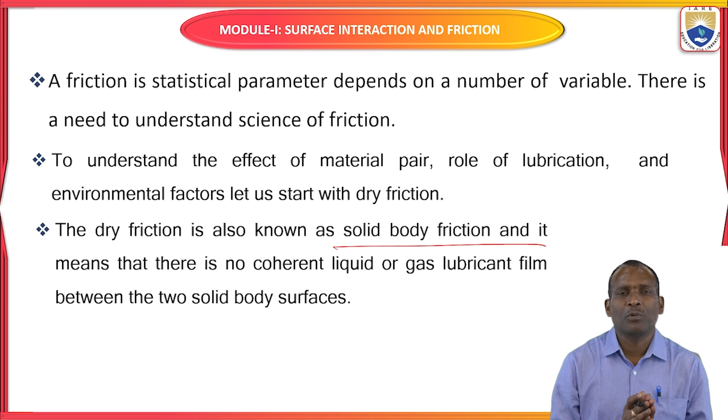Whenever lubrication is present between two contact surfaces, it may be minimum film thickness lubrication or hydrodynamic lubrication, and that may be called wet friction. That's why dry friction is also called solid body friction: there is no lubrication, no wet contact between these two surfaces. The two are purely solid. Another important thing here is the adhesion property.

Here there are two main friction sources: one is adhesion and the other is deformation. Some force is needed to plough asperities of the harder surface through the softer one, to remove the material, to scratch it, that is, the asperities, irregular surfaces, through the soft surface. In the lubricated tribopair case, friction due to adhesion will be negligible, while for smoother surfaces under light load conditions, the deformation component of friction will be negligible. So two conditions are there: adhesion and deformation.

In a lubricated tribopair, adhesion is negligible, and for smoother surfaces under light load conditions, the deformation component of friction will be negligible.

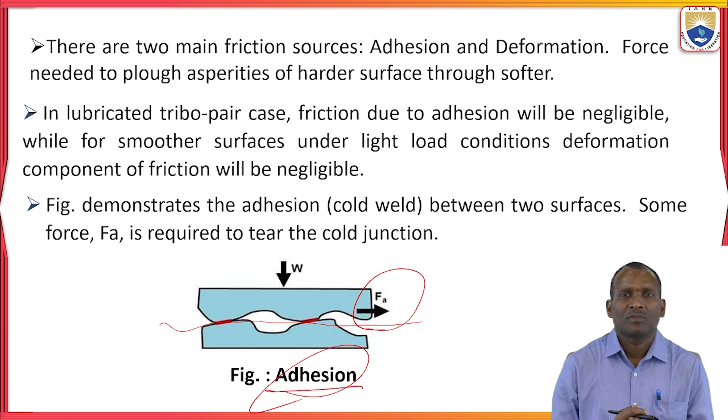This figure shows the adhesion property; it demonstrates the adhesion cold weld between two surfaces. Some force, which you can call Fa, is required to tear the cold junction. Suppose you want to tear these two surfaces apart; this is called a cold weld. Some force is required, and only then is tearing possible. So adhesion mainly means the contacting of surfaces: two surfaces in contact, and that is called a cold weld.

In the deformation case, this figure shows a conical asperity approaching a softer surface. To move the upper surface relative to the lower surface, some force is required, shown here as Fd. Fd means deformation force: to deform the surfaces, some force is required. In the previous case, adhesion, it was Fa, and here Fd for deformation. So there are two friction sources: deformation and adhesion.

So what is the resulting force, and how will you calculate it? It is the sum of the two contributing force terms, Fa and Fd. The resulting force Fr equals Fa plus Fd, which gives the resulting frictional force. In the lubricated tribopair case, adhesion is negligible; for smoother surfaces under light load conditions, deformation is negligible. So if the surfaces are lubricated, the adhesion is negligible.

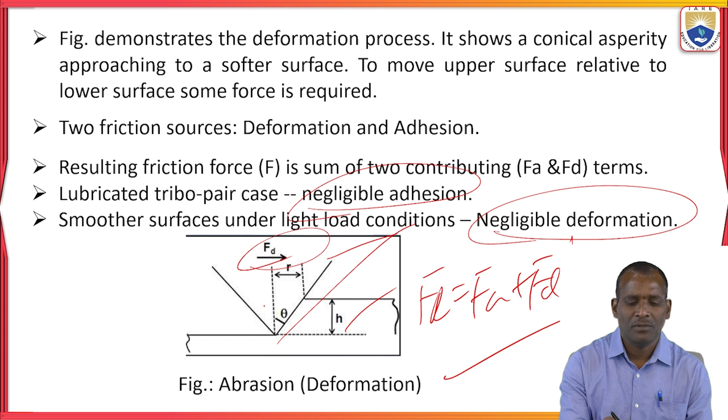So what is the theory? The first one is adhesion and deformation theory. We have seen how to calculate the resultant frictional force. This theory is based on the fact that all surfaces are made of atoms. So this theory is called adhesion and ploughing in friction.

So this figure shows the cold welding in steel and indium. The cold welding process is applied between two surfaces, two materials. One is steel, another one is indium material. So in this example, suppose this is a steel material and indium material. If you press the steel material over the indium piece, they will bind across the region of contact, like this. So this process is sometimes called cold welding.

Since the surfaces stick together strongly without the application of heat, there is no need for heat here. Without heating the material, you can apply force on one material to press it over another material. Due to the adhesion property of the materials, the two surfaces stick together. This process is called cold welding.

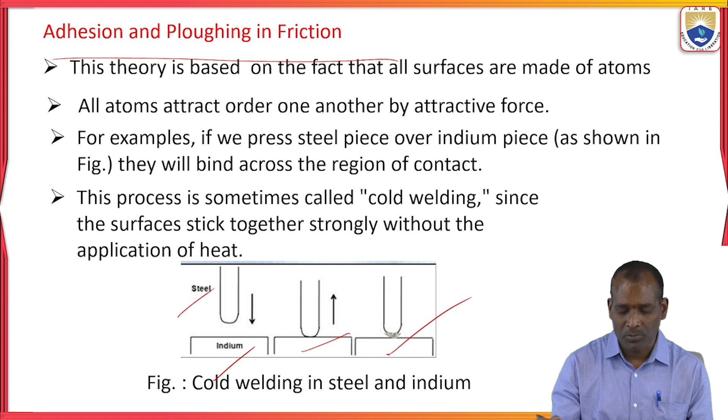So in this, the surfaces are made of atoms, meaning they attract one another by attractive force. So here we see the cold welding of steel and indium. It requires some force to separate the two surfaces. Here is shown carbon graphite and stainless steel. Stainless steel, and this one is a carbon graphite material. Some force is needed to separate these two surfaces.

If you apply a sideways force to one of the surfaces, the junctions formed at the regions of real contact will have to be sheared if sliding is to take place. So whatever force you apply to do this is the frictional force. The figure shows carbon graphite material adhered to a stainless steel shaft. Due to some application of force, this happens. One material adhered to the stainless steel shaft. Here two materials are shown. One is carbon graphite, another one is stainless steel.

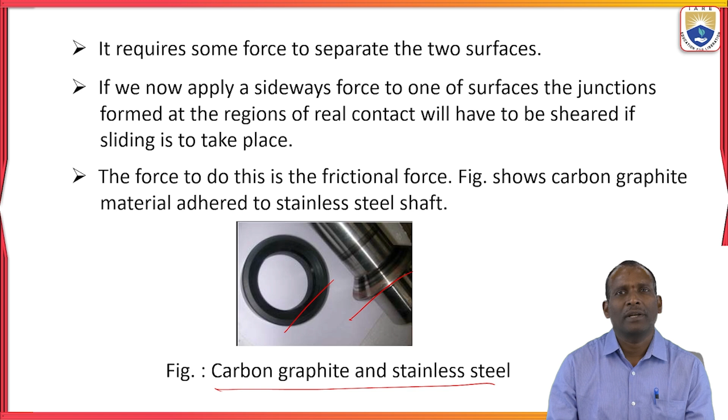The next theory is the theory of adhesive friction. This theory was developed by Bowden and Tabor. So what is this adhesive friction? As per this theory, on application of some force, that is W, the initial contact occurs at some of the higher asperity tips. Due to high stress, those asperities suffer plastic deformation, which permits strong adhesive bonds among asperities.

So whenever you apply a force on a material, some stress will be developed. Due to this high stress, all the asperities on the surfaces undergo plastic deformation. So it leads to adhesive bonds among asperities. Such cold formed junctions are responsible for the adhesive friction.

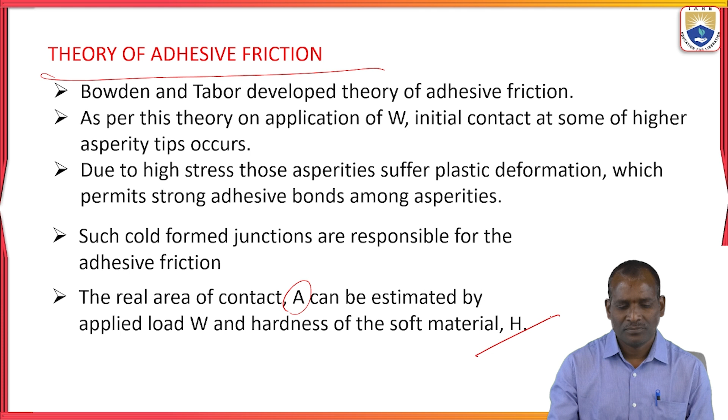So the real area of contact A can be estimated by the applied load W and the hardness of the softer material, that is H. If S is the shear stress of the softer material, then the adhesive force required to break these bonds can be estimated by the equation Fa is equal to area into S. So you already know the shear stress S is equal to load per area.

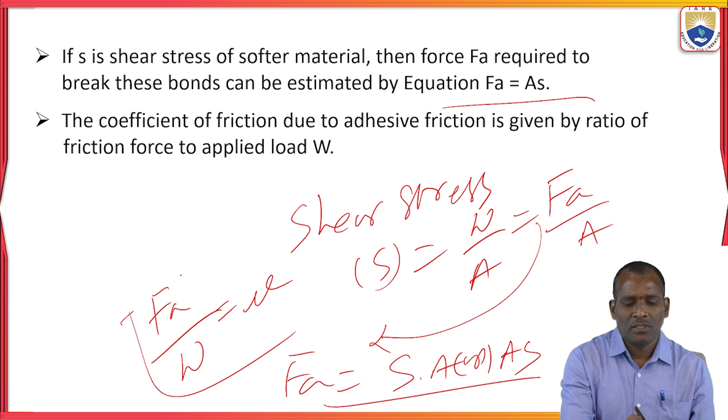So here it is the adhesive force upon the real contact area. So you can write Fa is equal to S into A, or AS. By using this equation, you can calculate the adhesive frictional force. The coefficient of friction due to adhesive friction is given by the ratio of frictional force Fa to the applied load. So by using this equation, you may calculate the coefficient of friction.

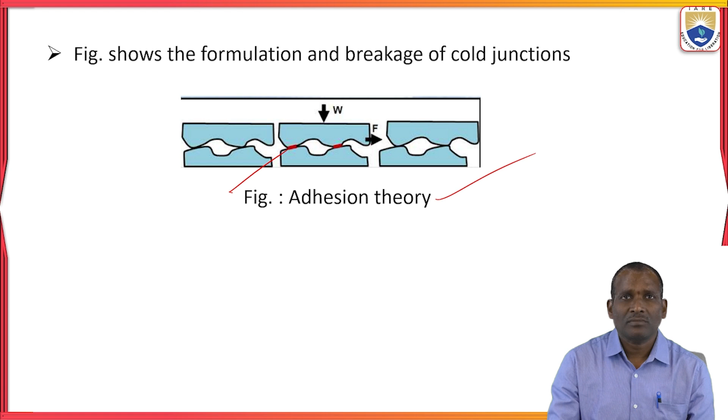So in this figure, two surfaces are pressed together under load. The material deforms until the area of contact is sufficient to support the load, that is, A is equal to W upon H. Here H is the hardness of the material. The material deformation depends upon the hardness of the material. To move the surface sideways, it must overcome the shear strength of the junctions with force Fa.

So you already know mu is equal to frictional force by load. So you can write it in terms of shear strength and hardness, where S is the shear strength and H is the hardness of the softer material. So these two values decide the coefficient of friction.

So it means whatever the properties of the other harder mating material, the coefficient of friction would not change. The coefficient of friction will change only due to the hardness and shear strength. Whatever the remaining properties, it will not change.

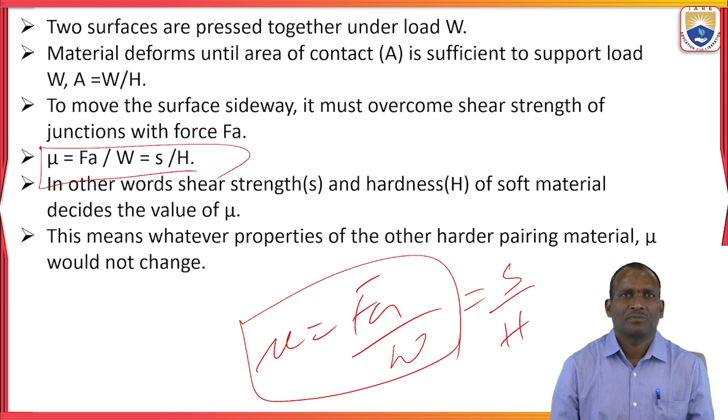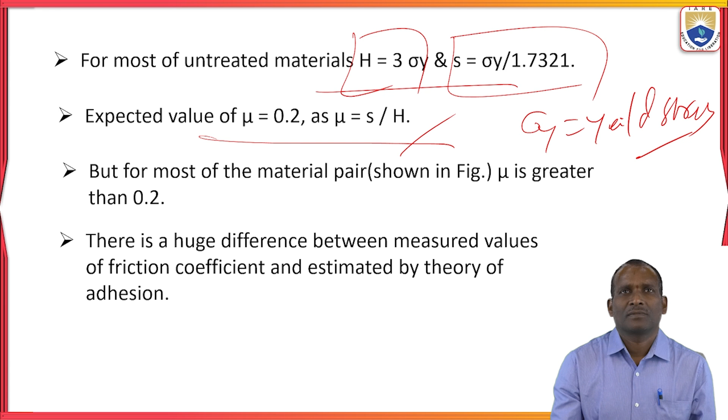For most untreated materials, the hardness is 3 times sigma y and S is sigma y upon 1.7321. Here sigma y is yield stress, and the expected value of mu is 0.2. So you can write mu is equal to S by H, and for the harder material, the hardness is 3 times sigma y, the yield stress of the particular material.

Here there are two types of material: treated materials and untreated. Some heat treatment processes are there to improve the properties of the material, like annealing, normalizing, carburizing. Without doing any heat treatment, those materials are called untreated materials. So you take normal simple material.

How do you calculate the hardness? First take the yield stress of the material and multiply it by 3. Otherwise, S is equal to sigma y by 1.732. But for most materials, as already shown in the figure, mu is greater than 0.2.

So there is a huge difference between the measured values of friction coefficient and those estimated by the theory of adhesion. Whatever you measured practically and the value estimated according to the theory of adhesion, there is a lot of difference between these two values.

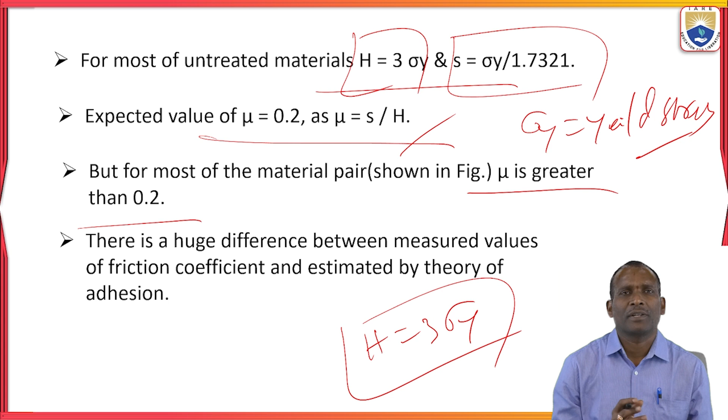Here are shown friction coefficients for various materials. The theory is unable to estimate different coefficients of friction for steel on indium and steel on lead alloy. The theory related to deformation needs to be explored.

See here the object sitting on a flat surface. The normal force is the weight of the object; here normal force is equal to mg, the weight of the object only. But if friction acts downwards on the object, the normal force is greater than the weight, not equal to the weight of the object, as shown in this diagram. That is mg plus F sin theta.

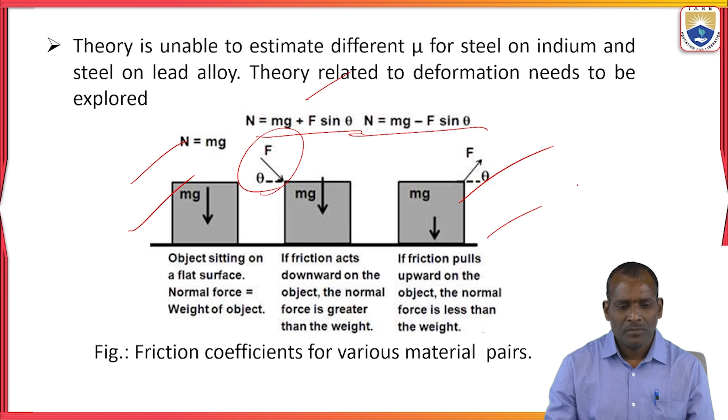Next one, friction due to deformation. Up to now, we have seen friction due to the adhesion property. This theory is based on the fact that contact between tribopairs only occurs at discrete points, where the asperities on one surface touch the other. Whenever asperities touch another material, only this contact occurs between these two surfaces.

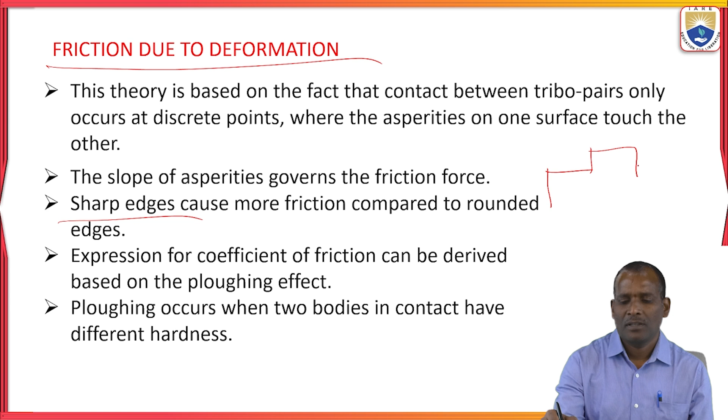The slope of asperities governs the friction force. Sharp edges always give more friction compared to rounded edges. Suppose in this object, this is a sharp edge. Here it gives more friction due to high stress concentration compared to the round edge, where some fillet is there. Why? Because at the rounded edge less stress concentration is possible, and at the sharp edge more stress concentration occurs.

The expression for coefficient of friction can be derived based on the ploughing effect. You may derive the mu equation based on the ploughing effect. Ploughing occurs when two bodies in contact have different hardness. It occurs only whenever two surfaces have different hardness properties.

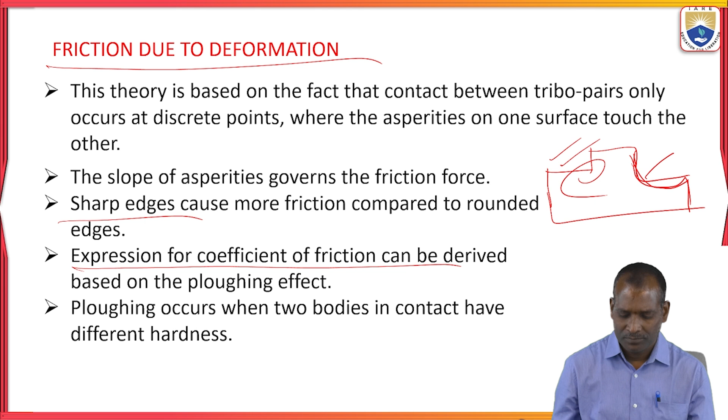In this diagram, per the deformation theory, the asperities on the harder surface may penetrate into the softer surface. We have taken a conical shaped object, the asperity of the harder material. Some deformation force is required so this surface penetrates into the softer surface, this one. This penetration produces frictional force. If there is relative motion, friction will be possible. So the penetration into the softer surface governs the frictional force.